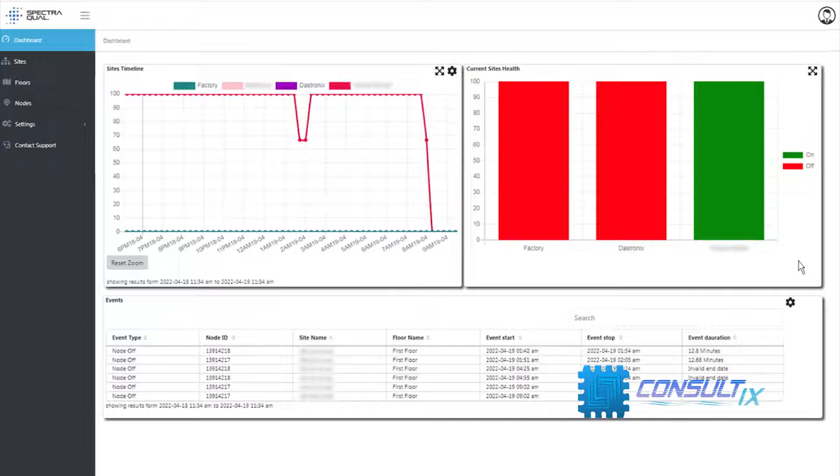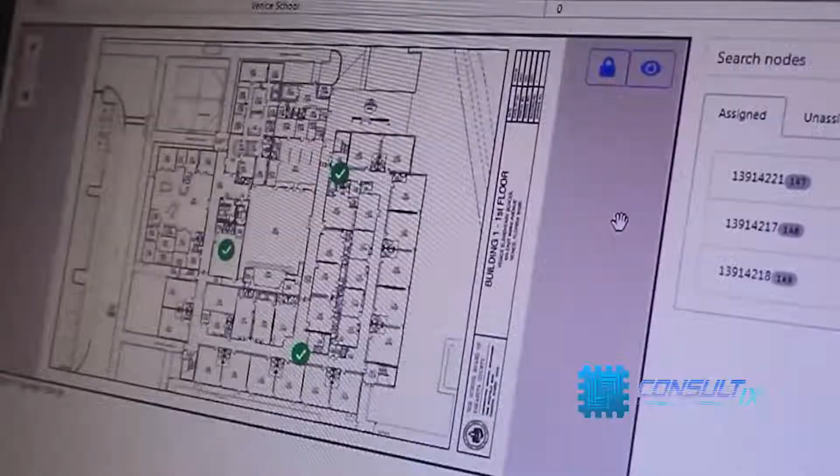In the Sites section, you have the option to create, view, edit, or delete active sites. If you choose the View option, the screen will display a floor plan depicting the location of the antennas already installed. Green indicates antennas are active and operational. You can move the location of the antennas, then lock it in place.

You can check the status of the node by actually clicking on the antenna icon on the floor plan. In the Node section, you can see a list of all the probes installed at the various locations.

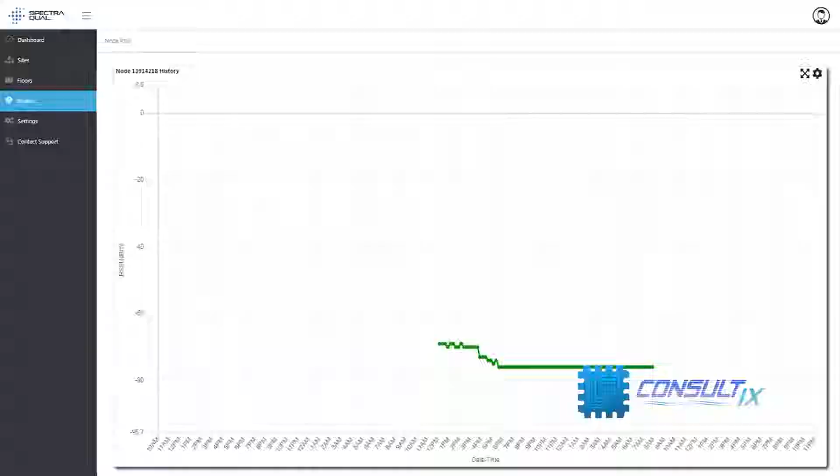If you click the graph icon under the Actions column, you can see the status of the probe from the moment of installation to the present time. These readings represent the received levels from the keep-alive signals transmitted by the probes.

If we go back to the Actions column, we can see the battery icon. Clicking it will display the levels of the battery of each probe during its active status.

Under Notifications, we have SMS configurations allowing us to notify automatically in case of a fault. In addition, we have the email configuration feature, providing a thorough fault notification system.

In the User section, we can define a hierarchy, such as admin, moderator, viewer, etc. All are password protected.

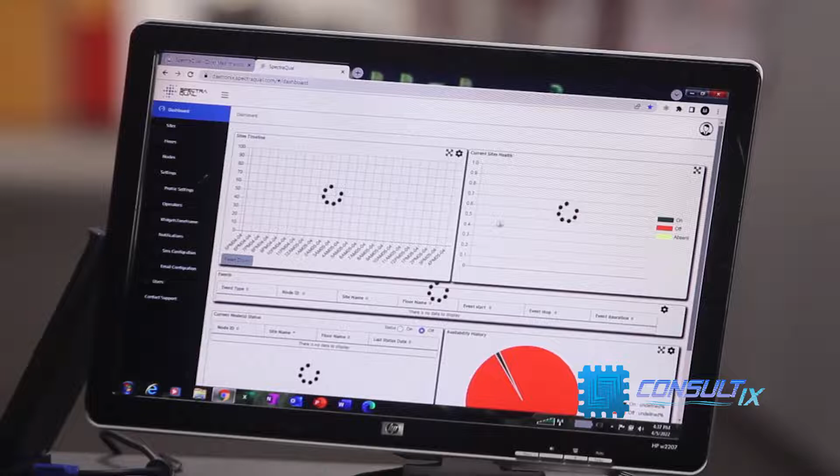SpectraQual, the most effective and complete solution to monitor and configure your Neuron system. And now let's move on to the Neuron configuration.

In this configuration, we're using an ADRF repeater. To capture the keep-alive signals from the nodes, we need to install a directional coupler.

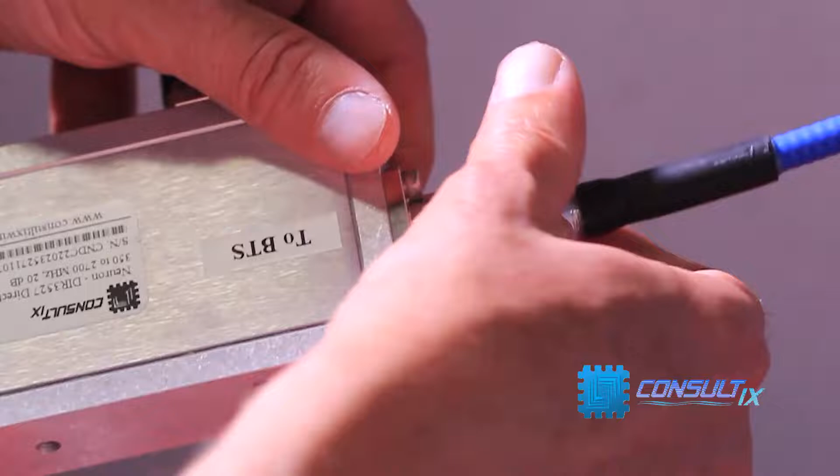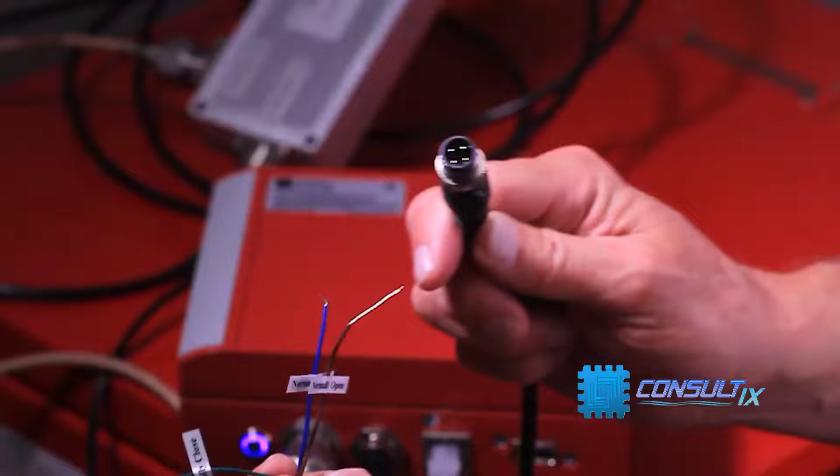Here I'm installing the connection to the BDA uplink, the passive antenna network, then onto the gateway server via the coupling port. This has a 20 dB coupling factor, which connects to the gateway to collect and process the keep-alive signals from the probes. If necessary, this cable offers a normally open or closed contact for local alarm applications.

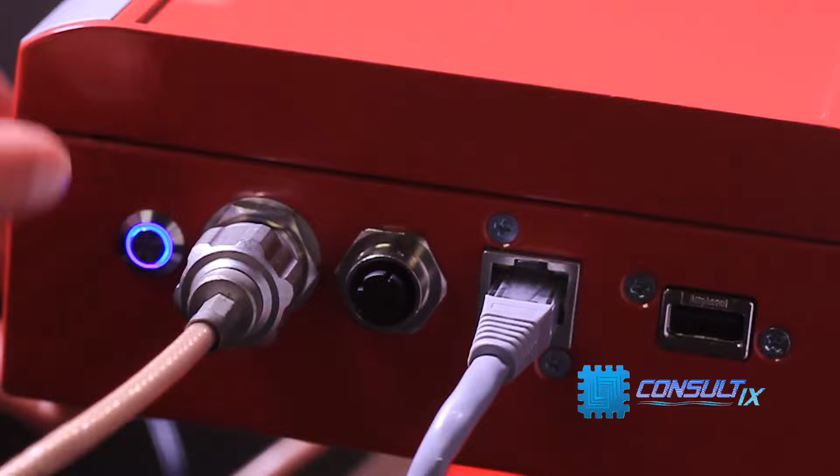The gateway has an IP65 NEMA4 enclosure. The connector here offers a 5V 3A power supply, DAS connector, alarm panel connector, Ethernet port, and USB port.

The gateway offers a wired and wireless interface connectivity, included with all Neuron products. In this configuration, we're connecting directly from the gateway Ethernet port onto the network for remote access.

So now let's move to the actual gateway. So here we are, we are looking at the GUI. We already logged in, we'll give you the login information.

And here's the same probes that you saw on the SpectraQual. They're right here on the gateway. By clicking on it, you can extend it and get some information. This is designed so the technician can be on site, log in.

When there's an error code, he can come into the equipment room. He doesn't have to be in the SpectraQual system. Or if the customer doesn't have a SpectraQual, it's just an alarm system, then this will work great.

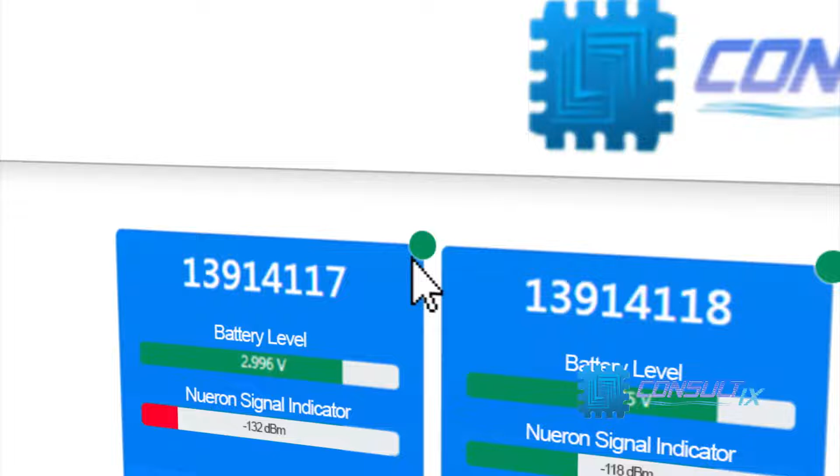The probe is green and the antenna is transmitting. The red, the antenna is not transmitting. We also show here, as you can see, we can give it names. We can say antenna 1, and you can say floor 3, whichever name you want to give it.